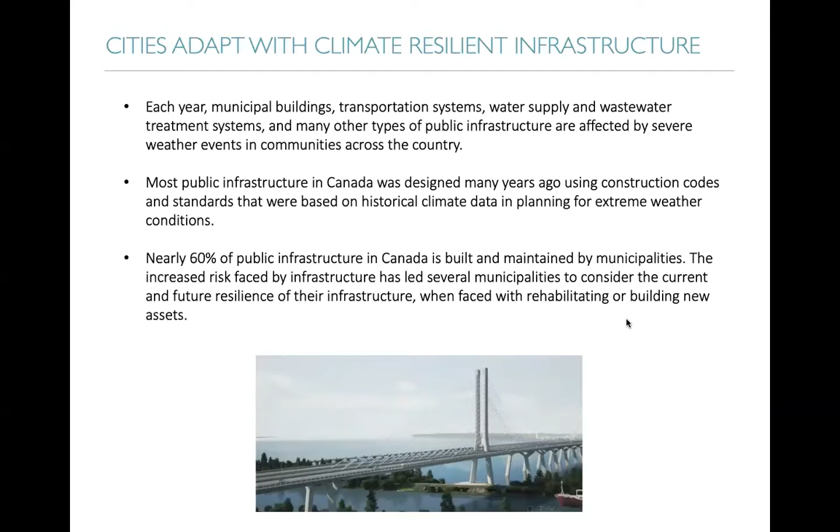We know that nearly 60%, according to the Federation of Canadian Municipalities, of public infrastructure in Canada is built and maintained by municipalities, which links to the big role that communities have to play. And the increased risk faced by this infrastructure has several municipalities considering the future resilience of their infrastructure when faced with either rehabilitating or building new assets or new systems.

I want to share some numbers. One of the things we try to do with the Cities Adapt report is that each book has 20 communities, and we try to include representations from communities across many provinces and territories, including Indigenous communities. We try to represent small and large communities. And so in this specific report, we covered 8 provinces, 2 territories, including 2 Indigenous communities. We have communities that vary in size from 120 inhabitants to nearly 3 million.

We have 9 different types of public infrastructure that are covered, including roads, water reservoirs, various drainage and stormwater infrastructure. We cover mostly adaptation to flood, but we also touch on erosion, drought, storm surge, and landslides as well.

In our latest reports in the series, we really link them to the Sendai priorities for action, and we've noticed that each of the case studies was maybe stronger in one element, so we organized them alongside the priorities for action, which are understanding risk, with the idea that disaster risk management should be based first on understanding the risk. What are the dimensions of vulnerability? What is the exposure? What type of hazard may we face in a specific area? So to really start with that, to be able to take the appropriate adaptation action after.

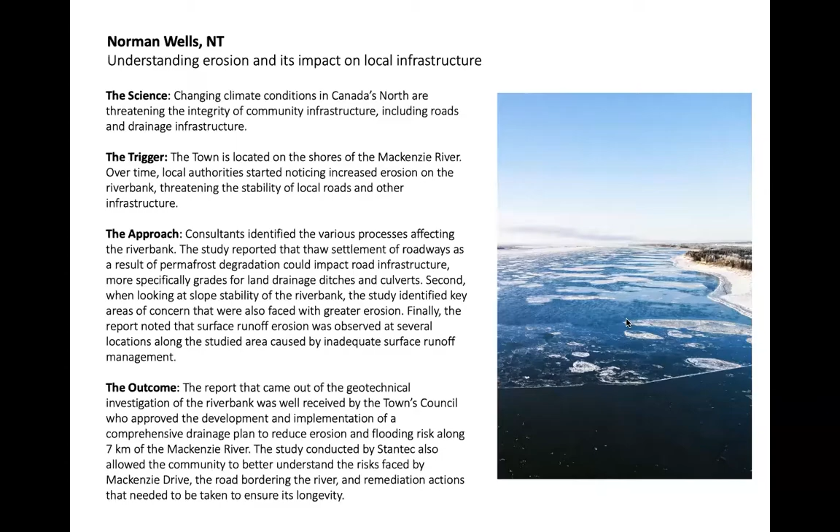So when we spoke with Kathy Clark, who's the Senior Administrative Officer for the town of Norman Wells, she told us that as northern communities are facing the impact of climate change, it is instrumental to not only inform, but to educate community members of the risk faced by local infrastructure and the need to implement adaptation actions in the future so they don't come as a surprise.

Oops, sorry. Now, moving back a little bit further southeast, we have the city of Laval in Quebec, which is on the north shore of Montreal. We have a lot of case studies in this book of communities that use the PIEVC protocol, which stands, for those who may not know of it, for the Public Infrastructure Engineering Vulnerability Committee.

This is a protocol that was developed by Engineers Canada to help communities, for example, better understand the risk or the vulnerabilities faced by their infrastructure, and to better understand what are some of the actions that could be taken to reduce these vulnerabilities to specific climate risks. So that protocol was created in 2005 to allow for engineering assessment of the vulnerability of Canada's public infrastructure.

And in 2011, the city of Laval was amongst the early adopters of the protocol, and they chose to use it on the Belgrand overflow structure, which was part of one of their big basins. So the city of Laval partnered with external partners such as Ouranos and a consulting firm, and they recruited the right stakeholders from various municipal departments to understand the infrastructure as a whole.

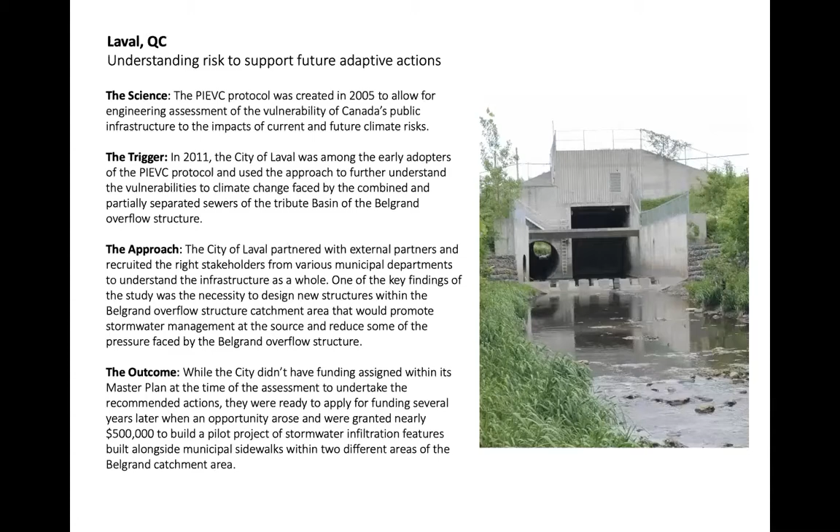And they were granted nearly $500,000 to build a pilot project of stormwater infiltration features built alongside municipal sidewalks within 2 different areas of the catchment.

So when I spoke with Martine Galarneau, who's an engineer with the city of Laval, she told us that the protocol allowed them to highlight specific risks and vulnerabilities that may have otherwise been missed without the multidisciplinary approach that was used. Larger municipalities have a tendency to work in silos within individual departments, and the approach promoted by the protocol allowed them to foster strong collaboration between various groups.

The work they undertook allowed us to understand the specific challenge faced by the Belgrand overflow structure and enabled the municipality to start planning for future projects and act quickly when capital funding became available.

All right, staying in Quebec for this next one, we're moving to the municipality of Victoriaville for a reservoir restoration project. So municipalities around the country rely on reservoirs for potable water, and more frequent floods and droughts can reduce the reliability of the reservoir's water supply. So the amount of water available in reservoirs can also be impacted by sediment accumulation, which can worsen under increased

erosion conditions upstream. Specifically in Victoriaville, the city first started looking into the causes of some water losses they were noticing in their reservoir over 20 years ago, and they studied it over time. I think it was over 10 years. And the initial studies revealed that one of the main issues was the high amount of sediments that were gradually filling the basin at a rate of approximately 16,000 cubic meters per year. And so when that happens, obviously the water is less deep, which causes the water temperature to increase, which can cause the proliferation of a certain type of bacteria. It just creates a whole lot of risk for the community.

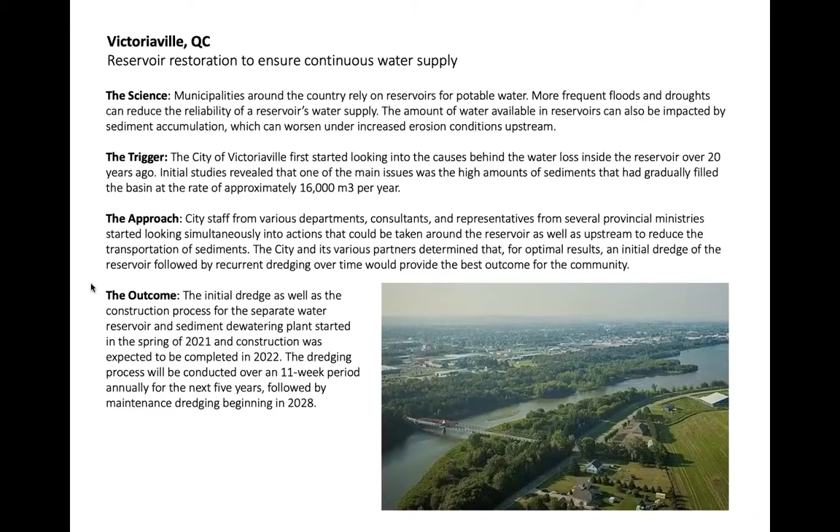When we spoke with Joël Lambert, Associate Director of Engineering and Environment Services for the city, he mentioned that it is important to work as a team, both internally and externally, to make sure that all departments and stakeholders are aligned on desired outcomes and deliverables. They found that it was important in Victoriaville to build on a unifying goal that brought benefits to all parties involved. And while it took a long time to get a comprehensive understanding of the situation that they were dealing with and identifying the right adaptation solution for the community, it was key to do so to ensure public funds were invested in a way that would serve the population in the long run.

All right, so now moving to some of the disaster risk governance case studies that we identified. Moving to Ontario, in Toronto, some of you may remember back in 2005 the Finch Avenue culvert collapse, which was caused by an extreme rainfall event in August 2005 that brought a significant amount of rain over a short period of time. The existing corrugated steel culvert was undermined by water and debris accumulating behind it. Debris from an upstream stretch of Black Creek gathered downstream and blocked the culvert, resulting in a buildup of pressure and its

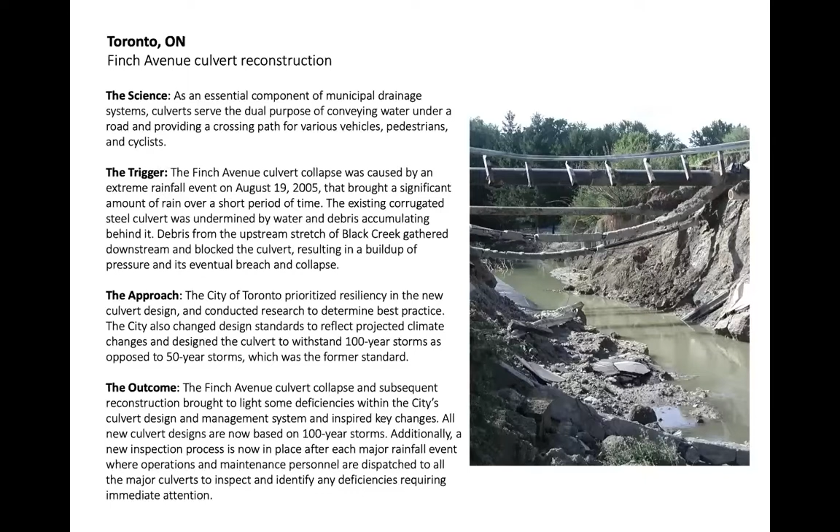And additionally, a new inspection process is now in place after each major rainfall event, where operations and maintenance personnel are dispatched to all the major culverts to inspect and identify any deficiencies requiring immediate attention. And this was one of the strong case studies, and we've seen in other communities as well that part of increasing climate resiliency is really about the infrastructure itself. But a very important part is also about the maintenance, the asset management plan, and how you plan to keep it in good shape over time.

When we spoke with Nazareno Capano, who is the manager of transportation policy and innovation in the transportation services of the city, he mentioned that he would suggest undertaking climate change vulnerability assessments for major pieces of infrastructure, as it will help identify potential risks and guide the development of programs and procedures to mitigate the future impacts of climate change. It is crucial to put in place whatever is needed now to prevent adverse impacts of climate change in the future by first establishing where the priority is and by working with local conservation authorities for support.

The next case study brings us to Montreal, a slightly different type of infrastructure, to give you an overview of what's to come in our next report. And it's about rethinking urban parks to mitigate flood risks. So this is an urban flooding adaptation measure.

Like it is the case in many communities around the country, combined sewer systems have conventionally been used as the primary system to collect and transport rainwater during rainfall events. However, we've seen more and more over the last year that during extreme rainfall events, they easily get overwhelmed, which results in many cases of urban flooding, basement floodings across communities.

And so as a result, there's many cities in Canada and elsewhere that have started using land use planning tools as a way to naturally increase the absorption of rainwater into the ground, and mostly as a way to delay its transportation to the sewer system so that it is not as overwhelmed during peak rainfall, during peak precipitations.

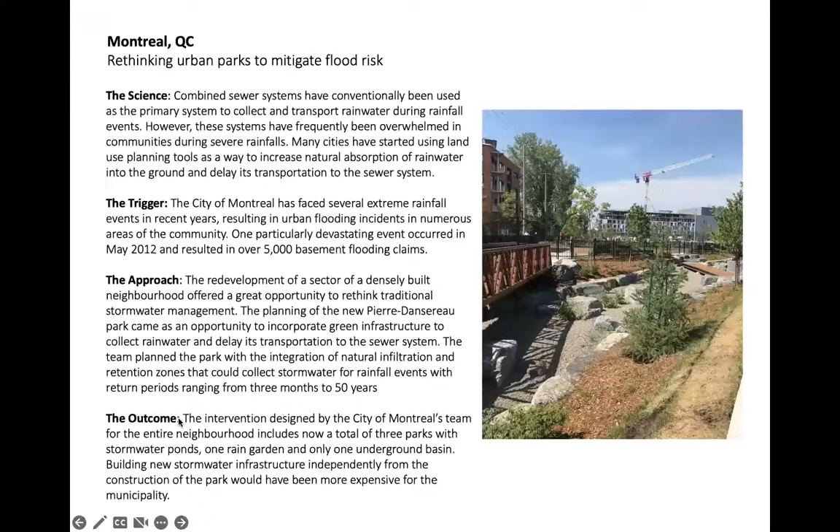When we spoke with the City of Montreal, they did mention that the system was replicated in many other parks of the city, and that it is now one of the key strategies used by the city, and that many parks are looking at more intersectoral collaborations within the city with urbanism and parks and several departments to make sure that these integrated projects can be replicated more often. Now, moving on to investing in disaster risk reduction.

So we're going back all the way up north. So we have the community of Tuktoyaktuk in the Northwest Territories, all the way north. In the north, road raising may be part of an adaptation and resiliency strategy in response to sea level rise, coastal flooding, coastal erosion for communities that are living on Canada's coast.

Warmer temperatures in Tuktoyaktuk have led to doubling in the frequency of summer storms during open water season, from 1 to 2 per summer to 3 to 4, combined with a change in the level of storm surge from 1.7 to 1.9 meter. This has led to increased erosion, and following a risk modeling study, funding became available from the government of the Northwest Territories through the Disaster Mitigation and Adaptation Fund to actually execute the road raising project in Tuktoyaktuk.

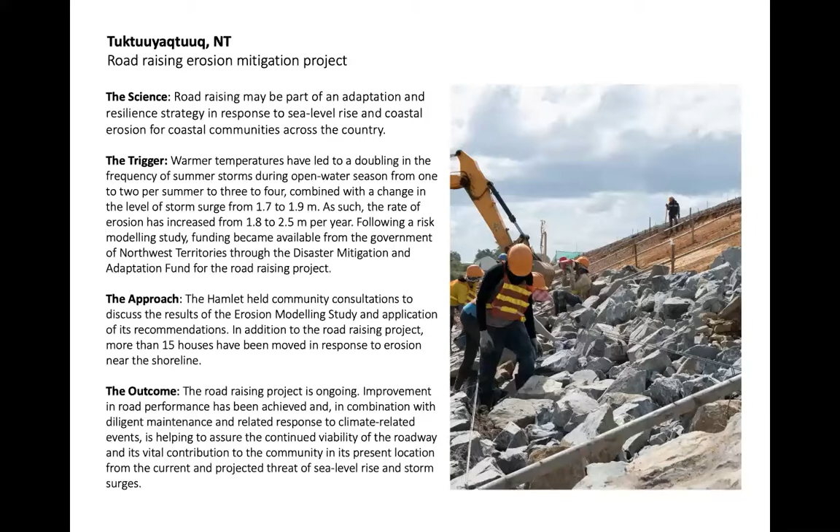There's about 1/3 that was completed at the time of publication of the book, which was December 2022. Improvement in the road performance has been achieved, and in combination with diligent maintenance and related response to climate-related events, it's helping to assure the continued viability of the roadway and its vital contribution to the community in its present location. We also know that communities like Tuktoyaktuk that are more remote are highly dependent on these roads to be connected with other centers, and so these projects are even more important for communities that are located in the north and remote from other centers.

When we spoke with Sean Stuckey, the Senior Administrative Officer for Tuktoyaktuk, he mentioned that despite the growing social and economic challenges faced by northern communities, challenges which were made increasingly more difficult by the COVID-19 pandemic and the changing climate, Indigenous communities can still be successful in protecting their infrastructure against climate change, and he recommends a 3-step approach that consists of securing funding, sourcing the right expertise, and ensuring planning that includes public engagement.

All right, now we are moving. I mentioned before that we want to ensure that we were covering issues faced by both large and smaller communities. So we are moving to the rural municipality of Torch River number 488 in Saskatchewan, who invested in the rehabilitation of the 6th Mile Bridge. Excuse me. So increases in winter and spring flows have been observed over the last several decades, placing bridges, but also other infrastructure at risk for flooding.

Many rural bridges in Saskatchewan and across other provinces and territories are in bad structural conditions and either are or will soon be under load restrictions to avoid them collapsing or facing additional damage. So the 6th Mile Bridge in this case is a 6 meter long, 7.3 meter wide bridge that served the tributary of the Kelsey Lake situated north of Township Road 532, which channels water year round. The bridge conveyed much of the spring flow, which is expected to increase under future climate conditions. And its deteriorating conditions suggested an inability to withstand future weather and climate changes, and necessitated a 3-ton load restriction in 2017.

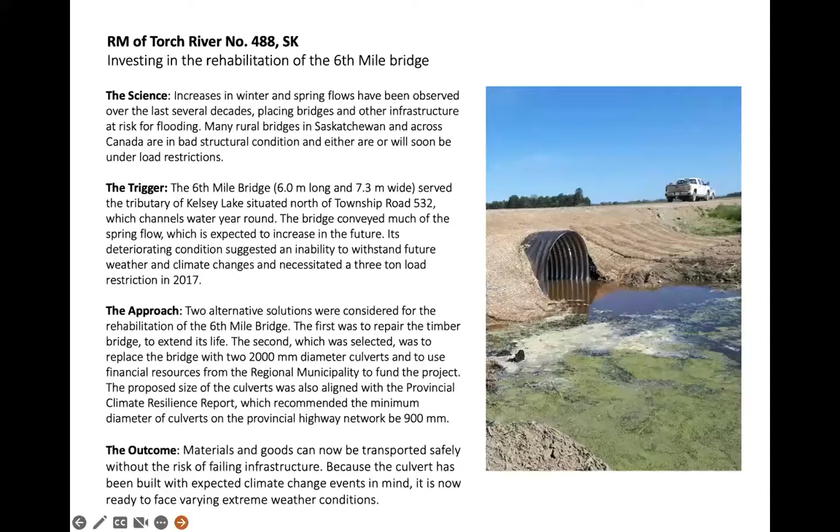When we spoke with Samrat Hussain, one of the engineers with the rural municipality of Torch River, he mentioned that in a community, it is important to inspect all assets routinely to allow the municipality to identify a list of assets that need attention. Municipalities just cannot leave the structure out there to fight with climate without looking after them. And one way to ensure requirements for inspections and paying close attention to critical infrastructure is to include it within an asset management plan.

Our final category is to build back better in recovery. So we have 2 more cases here, going back to the East Coast in St. John's, Newfoundland: the rehabilitation of a storm sewer to support current and future precipitation. We've covered some of that before, but as changes in precipitation patterns impact municipal stormwater infrastructure, it becomes even more important for municipalities to plan for the rehabilitation of storm sewers in a way that accounts for future rainfall projections.

So in St. John's specifically, as you all know, we are talking about a coastal city that has been impacted by several post-tropical storms in the past, including Tropical Storm Gabrielle, Hurricane Igor, and other large rainfall events that resulted in urban flooding, which at the time highlighted the need to upgrade the existing sewer system.

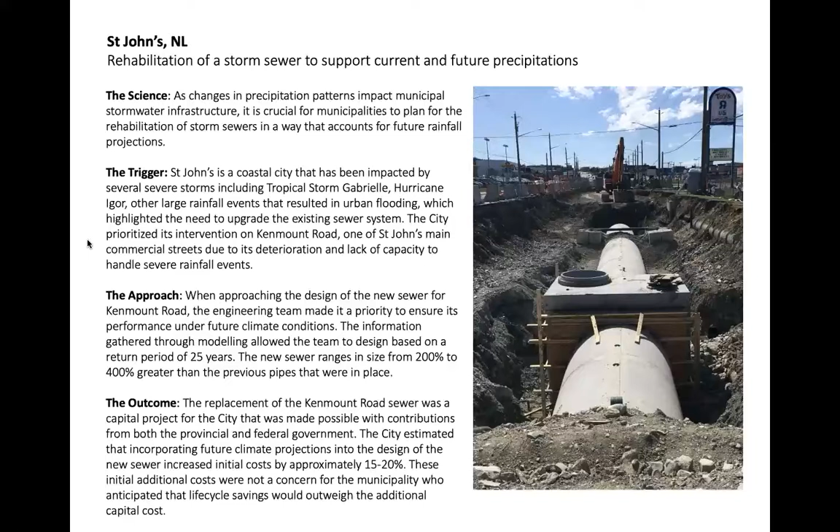So the replacement of the Kenmount Road sewer was a capital project for the city, and that was made possible with contributions from both the provincial and federal government. The city estimated that incorporating these future climate projections in the design would initially increase the cost by approximately 15 to 20%, but these initial additional costs were not as much of a concern because they anticipated that the life cycle savings would far outweigh the additional capital costs that they chose to invest.

When we spoke with Mark White, the manager of construction engineering for the city of St. John's, he mentioned that these projects take time and money to realize. Specifically in this case, it involved dealing with a lot of stores, a lot of road changes, as it was one of the main roads in the city. And it is essential to understand the various risks and rehabilitation benefits associated with infrastructure replacement. There will never be a shortage of projects, and the successful completion of impactful initiatives also means there are less things to worry about in the future.

The final case study that I want to share today is in Edmonton, Alberta, and they incorporated climate adaptation measures into the Quesnell Bridge design. One of the reasons I thought it was an interesting case is that this infrastructure was not changed due to a specific event happening. They were going to upgrade the infrastructure nonetheless because they needed a larger bridge, and they decided at the time to make the change.

So more specifically, because of population growth and the expansion of communities, they were faced with high pressures to reduce traffic. And that specific bridge in Alberta is one of the 9 roadway bridges crossing the North Saskatchewan River in the city of Edmonton. And since the bridge was originally built, Edmonton's population has more than tripled, and the traffic volume has increased considerably. So in order to alleviate traffic on the bridge, the municipality decided to undertake a rehabilitation of the bridge to include 2 additional lanes and to do it in a way that ensures structural performance over the next 50 years.

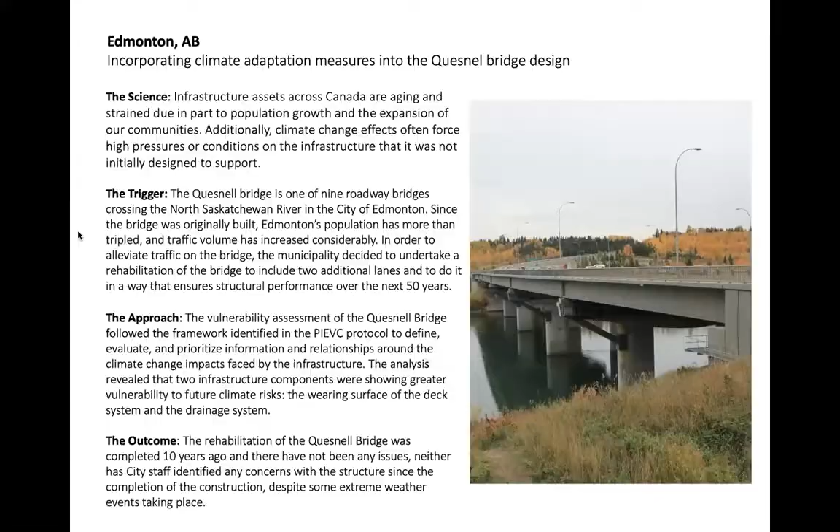When we spoke with Mark Scanlon, who is the bridge supervisor with the city of Edmonton, he mentioned that investing in the proper rehabilitation of key municipal infrastructure can have immense environmental and financial benefits for communities. He's a strong believer that the most resilient and environmental structures are the ones in place. The more we can do to protect them, the more sustainable and less costly they will be over time.

So obviously, those are about half of the case studies that we've collected. They're all available online. But from these 20 case studies, we took out 4 main best practices that we've noticed throughout the report. So the first one, very important, that we've seen in all case studies in this report, is that understanding infrastructure vulnerabilities to climate risk is really the first crucial step.

Policies, design, and construction practices for public infrastructure should always be anchored in a very strong understanding of the specific risks and specific vulnerabilities faced by either a specific asset, but also its broader infrastructure system when that's applicable. And to really start with that, to be able to not only implement the right adaptation measures, but also prioritize them over time, understand which ones are more at risk than others, and really integrate that within our second best practice, which is to create asset management plans.